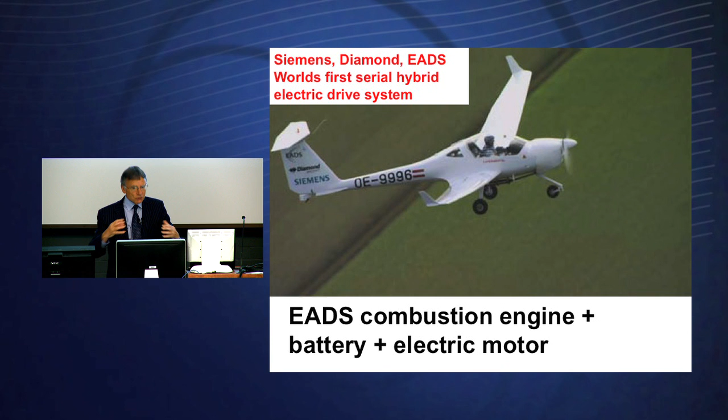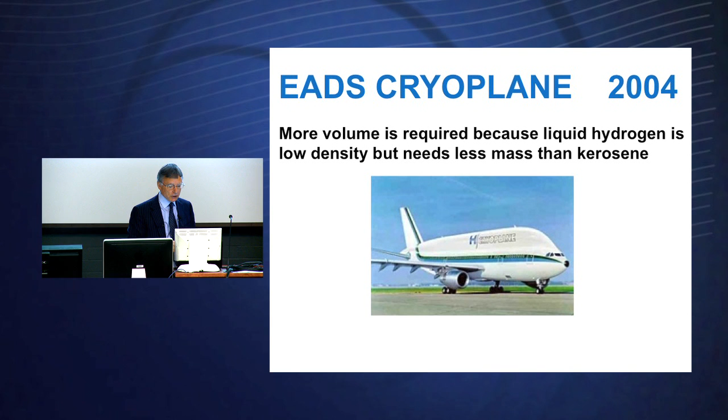So what I want to do today is talk about this idea that hydrogen has a part to play in transport, especially in the future. Right now it's not at all effective or economic. But this is a paper we published this year with my colleague Bruno Pollet. And there are really four topics. How can we store energy in planes, which is very challenging because the weight is so important, and then in ground transport, where weight maybe not so important, but I'm going to say at the end, we really have to consider weight as a key factor in ground transport.

Then what about things like batteries, supercaps? We need pulse power. We don't just want a steady flow of power. We have to take off, we have to accelerate, we have to store energy when we recover energy from kinetic energy. Then what about hydrogen stores? I mentioned cylinders, they're no good. We have to do better. Maybe you have some ideas to improve that.

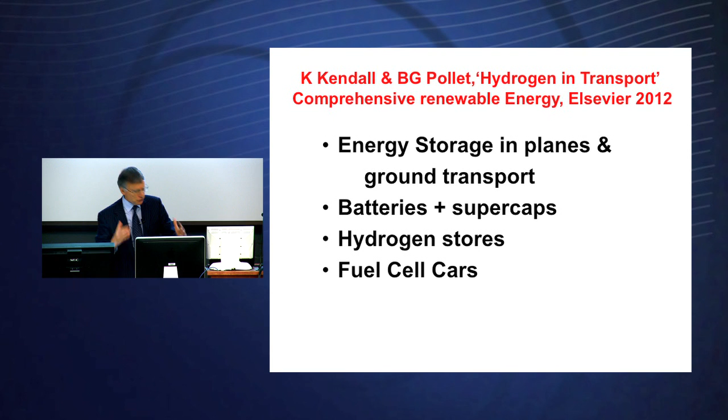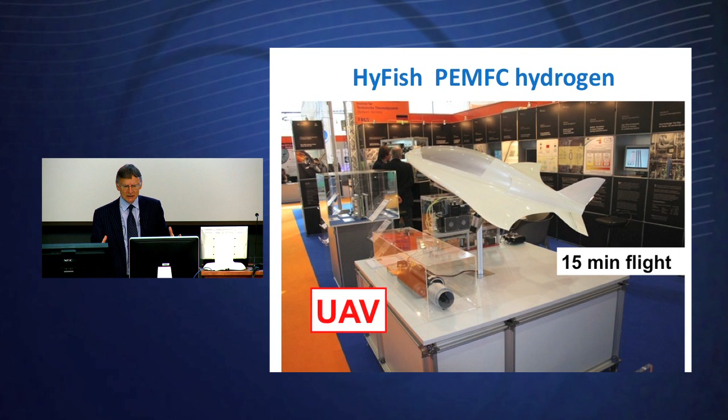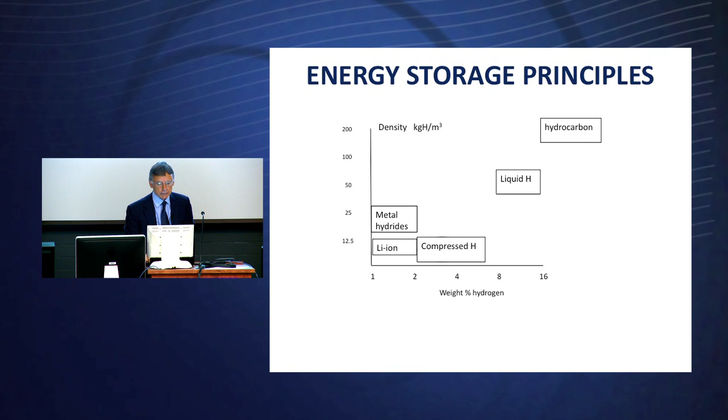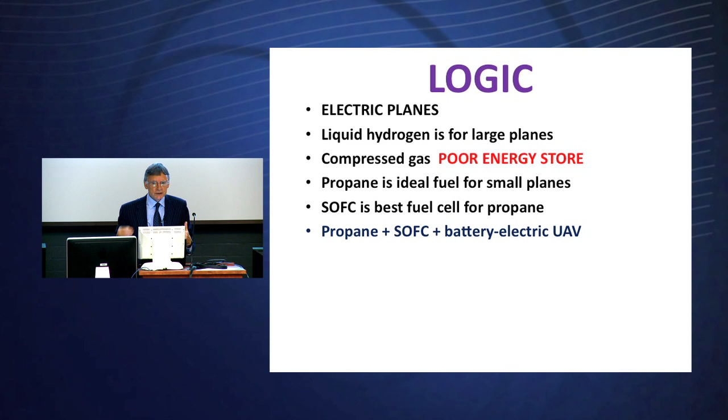So the logic we have, a little project we're running right now, we've run for a year in Birmingham. We need electric planes, they're only small, so we're not going to use liquid hydrogen - if you had a big plane, you'd be using liquid. We don't want compressed gas, so we're going for propane, back to hydrocarbon. There's not too much carbon in propane, it's just a bit worse than methane. But then what fuel cell do we use? Well, the solid oxide ceramic fuel cell running red hot is better on hydrocarbon because we can process it at 700, 800 degrees, rather than having to use platinum in a low temperature fuel cell.

So here it is, a propane UAV with SOFC fuel cell, a battery, and electric UAV. This is the project we got funding from London for. We've run it for a year now, and we're going to fly it in the next 6 months, we hope. It's a UAV with SOFC power, a LiPo battery, propane energy store, and here's the key thing - can we start up this high temperature fuel cell in a few minutes?

That's the nature of our invention, because the ceramic zirconium oxide fuel cell, as you know, expands quite a bit, creaks around, and can crack very easily. Typically, a solid oxide fuel cell from the Australian company CFCL, based in Melbourne, can take 3 or 4 hours to warm up.

Well, that's no good if you want to fly a plane. You want it to start within a few minutes.

So this is an oxygen ion conductor. That's the real key to this, and I'm going to show you a picture in a minute. Then you put on a cathode, a black cathode, this perovskite material. It could be LSCF or LSM, perovskite, and then you wrap a wire around to pick up the cathode current, and you have another wire going up inside.

The real key point about this, we can start this up in seconds. The thermal shock resistance is 10,000 times better than the CFCL one you find in Melbourne. And the smaller diameter is also important, because it's like a heat exchanger. You've got to pack surface area into the reactor. You need small diameter. If you have big diameter, there's less surface, and you lose out on power density.

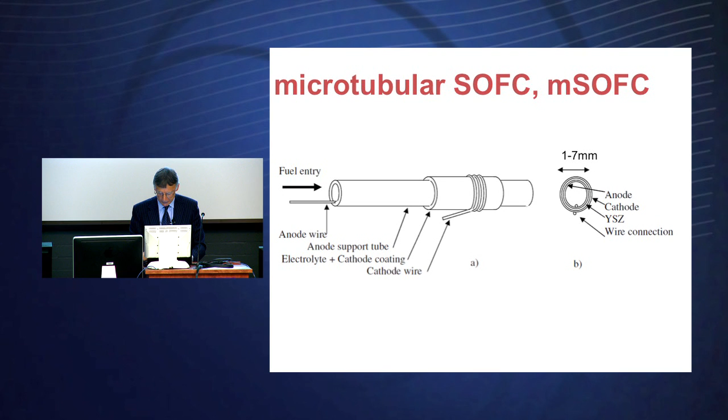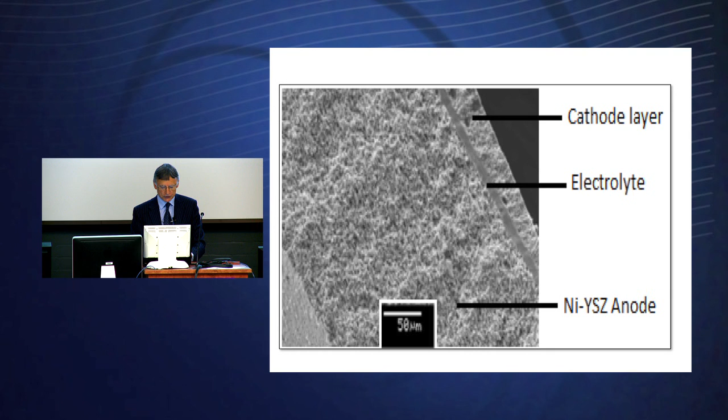And you see a cross-section right here. Here's the nickel anode, which is porous for the fuel to diffuse to the electrolyte. Here's the dense, non-permeable layer of yttrium stabilized zirconia, 10 microns, and here's the cathode. So what happens? Oxygen comes in, ionizes, the ions go through, meet the fuel, and then you get the reaction. 1 volt across it, 1 amp per square centimeter, typically. These are rule of thumb sort of numbers.

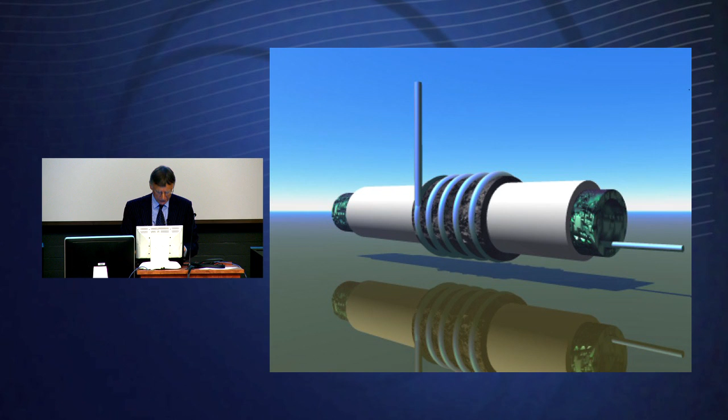So here it is, the 5 materials, a little picture of that. And this contrasts with the original Westinghouse, fairly successful SOFC that came in 1990. They failed to commercialize it, and you can see why. These are 1-inch tubes, 2 meters long, and very susceptible to thermal shock.

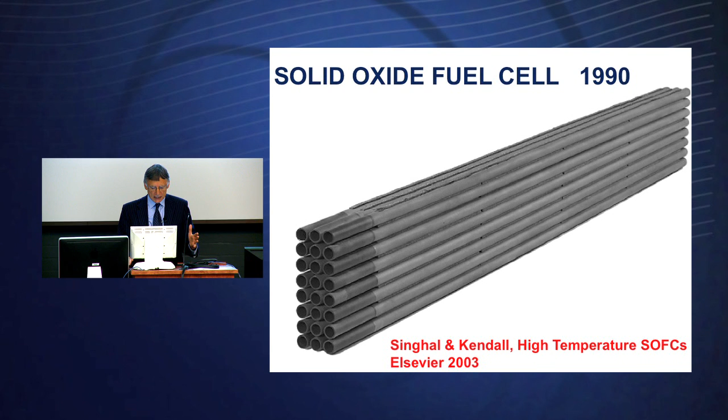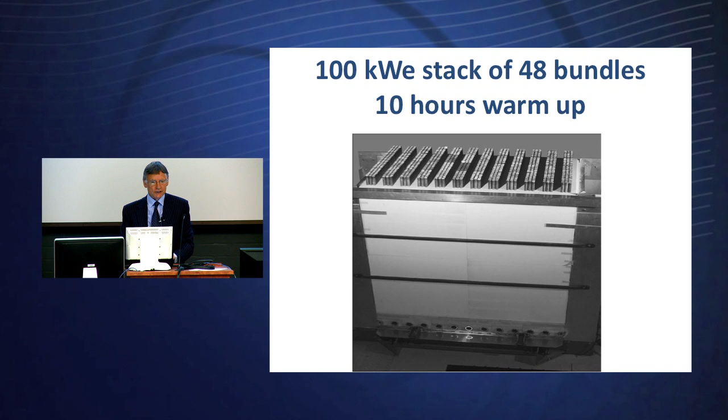So when you try to get this to operate, you've got to build a bundle of these things, a stack. For a 100 kilowatt stack: 10 hours to warm up, 5 tons, and a container to produce 100 kilowatts. Whereas a little combustion engine to do the same thing, a car engine essentially, would fit just in the base of this thing. So you can't really compete with combustion technology with this sort of big diameter, low power density thing.

So you need to get smaller. A smaller diameter means much more rapid reaction time, and this then makes a lot of sense. This is the basis of our operation. And the connection between the startup time, on a log scale, and the tube diameter is very strong. If you have a 1-inch tube, it's 10 hours; 7mm tube, 10 minutes; 2mm tube, 10 seconds. Quite fabulous, nobody quite realized that. It's an amazing change of the startup time as you change diameter, which is all down to thermal shock, thermal gradients.

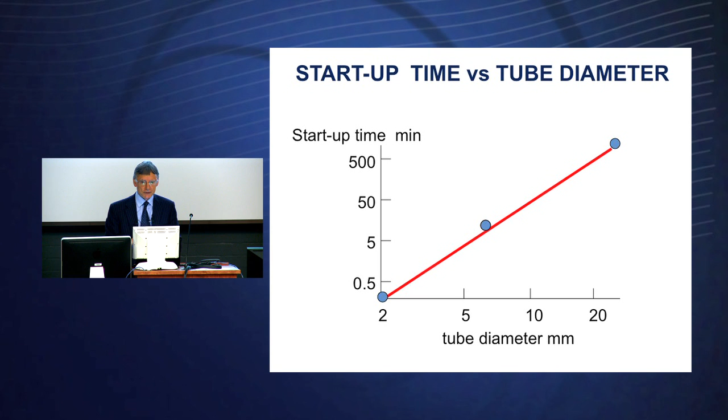We sacrifice a bit of power, but without sealing, we avoid all these problems of cracking of seals and leakage. So it's quite an interesting idea. The idea with our UAV is to get 100 or 1,000 of these tubes, put them in the aircraft and fly them. So that's what we're doing in the project.

We also have, on the back of that, a European project, and I know you have Australian projects here. The European projects have got to integrate across these 25 states. We need lots of partners. I had to write a 100-page document, and we had to pass it with lots of referees. EADS, in other words Airbus, is very interested now in UAVs. There's a company called Survey Copter in France which makes these things. Then we have a whole lot of other collaborators working on this project, and that will fly in the next 2 years.

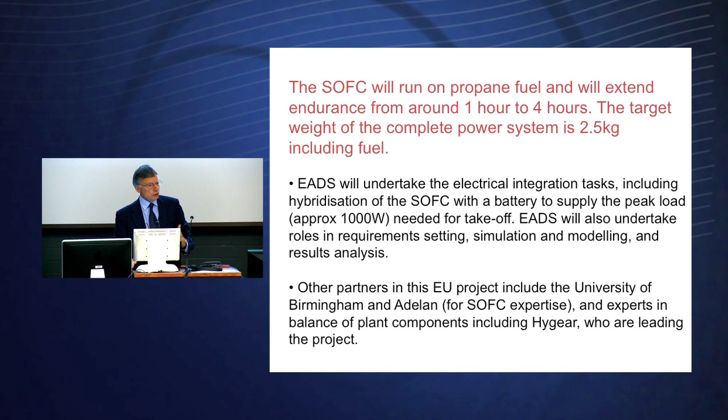The idea is we run on propane fuel, extending the endurance from a battery UAV, which is typically half an hour to an hour, up to 4 hours, hopefully 10 or 20 hours. So it's really energy storage which gives an order of magnitude better flight time in the UAV.

To get back to our European project, we have lots of work packages across these 25 states, and we all speak different languages. We have to write reports every couple of months, you know what it's like. But the key thing is, how do we test this UAV when we put the fuel cell inside? That's what I want to go into now.

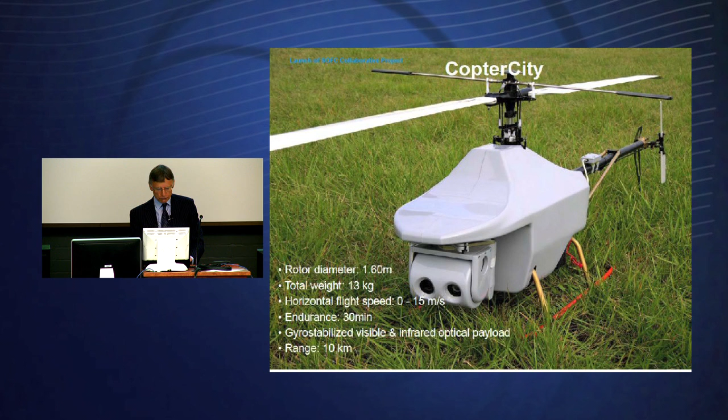EADS, or Airbus from Bristol, went across to France to meet Survey Copter, and John Price, Caroline Turner, and Tom Owen from Airbus talked about what we can put this thing in. Here's a little helicopter being used to take pictures, with fancy cameras, infrared and all sorts of sensors on the front. It weighs 13 kilograms, has a 1.6-meter rotor span, and flies for 30 minutes on lithium ion. Quite a nice machine.

Here's a heavier one, 30 kilograms. You can see the big lithium ion batteries, very heavy, but that keeps it going for about 30 minutes. The problem is when you plot the power use of these things, the big one uses something like 3 kilowatts, the lighter one 1.5 kilowatts. So you can plot a trend line, and here's our power supply, nowhere near good enough to satisfy this. So we have to write it off.

Everybody wants helicopters because they give much more control for taking movies. But in fact we've got to go back to the fixed wing, because here the power requirement is an order of magnitude less. So this should work.

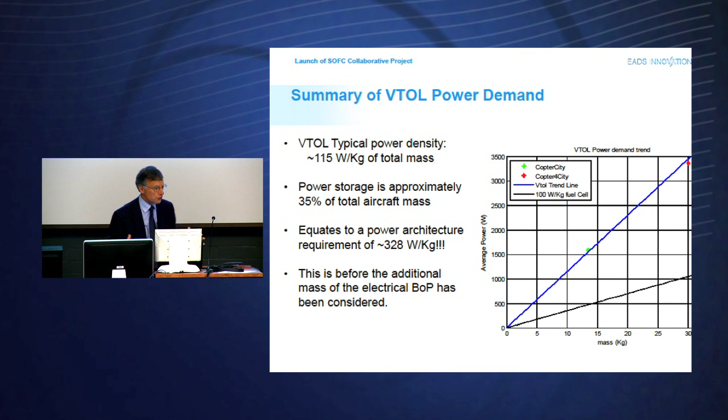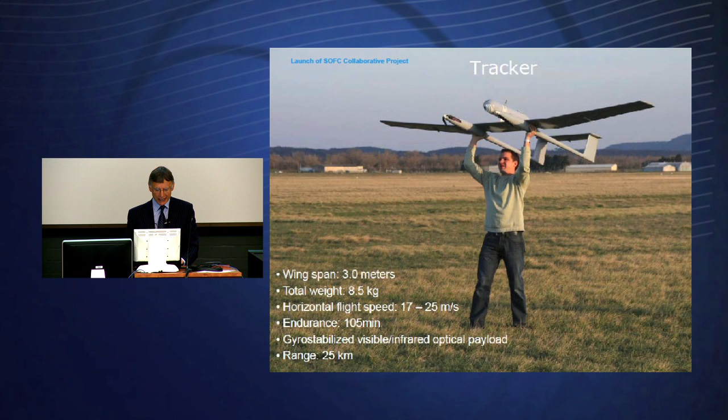This right now is the card from Survey Copter, runs on lithium-ion batteries, electric motor, 11 kilograms, can fly for about 1 hour. Here's a typical one, the tracker, launched by hand, 8 kilograms, flies for 1.5 hours on lithium-ion. Here's another one, 11 kilograms, flies maybe 1 or 2 hours at best on lithium-ion.

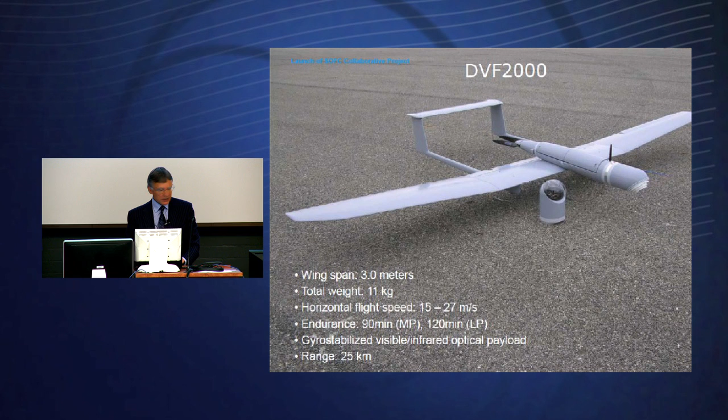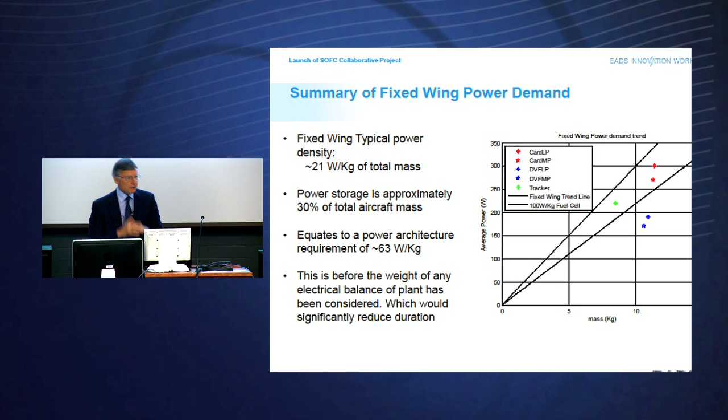Our objective is to extend that with our power supply, putting these points on the same curve. Here's about 300 watts for this, about 150 watts for this, and our power supply can do that. So the idea is we put our power supply in and extend the range. We concluded the helicopter really is a dead duck at the moment - remember we've got a 2 kilogram stack, a bit heavy, 250 watts coming out of it. That's not possible for the helicopter, but these ones, though a bit heavy, should definitely work, and we should get a factor of 10 endurance.

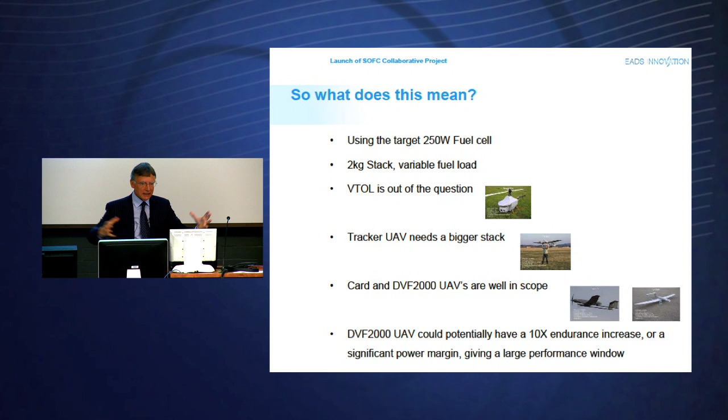While that's going on in Europe with a big European thing, just in our university with a couple of students we're doing the same thing, but with this little carbon fibre polystyrene aircraft. Here's my student Simon - he's flown it on batteries already, and since it belly flops on landing it's pretty robust. Now we shoehorn our fuel cell into here - here's the fuel cell, we're going to shoehorn that in. Here's the batteries, much smaller now, we don't need big batteries, this is just for takeoff. We're hoping to fly this in the next few months.

So this is a work in progress, but hopefully if I come next year we'll be able to say we've had some success - well, Simon crashed one already, so we've got a problem to solve.

So these delicate experiments we're hoping will work. Let's conclude on planes. It's a real challenge to get energy storage on aircraft, but if you can do that, you should be able to do all the other ground transport quite easily.

The real thing is that fuel cells have a great track record in space. UAVs are great for university because they don't cost much and students love them. Propane is a great fuel for energy storage, so we've got a bit of carbon in there.

The designs are available for testing. We've got an EU project. For the helicopter, maybe in 3 years we can improve the power density coming from our unit to get it to that level. We need another factor of 3, 4, 5 to make that work in the helicopter. But we'll be flying the UAV in 2013.

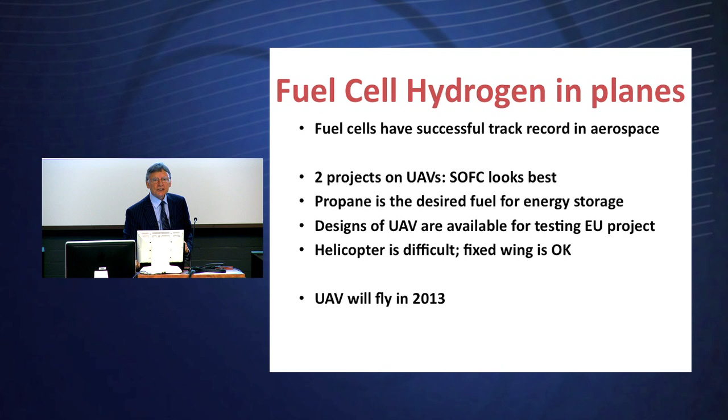So let me now move on to ground transport, because this is my main interest. We need 1 billion cars. Is it possible they could run on hydrogen or clean fuel with no emissions and twice the efficiency? That's the question. There are 4 areas in Europe, and I'm not sure what's happening in Australia here, but the first area is forklift trucks, because in a warehouse right now they're using batteries.

Here's the fuel cell motorbike from Intelligent Energy. Here's the fuel cell bus from Mercedes. And here's our 5 cars outside our university campus driving around.

The thing to remember, a campus is really a test track. You've got to think of campus as a test track. Students are like bollards, we've got to sort of negotiate around them. We don't hit them, hopefully.

A university is a great thing. We've got insurance. We can't run these on the roads, these are prototypes, but the students like them. We're only going 20 miles an hour, very low power. We can do lots of tests on the campus, and it's been a great experience to run these things around. Let's look at the forklift.

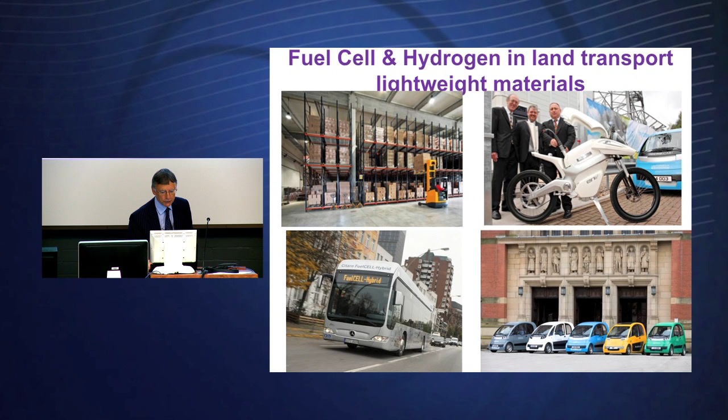The thing about the forklift is we need weight to balance out the thing we're carrying around. So that's useful. Of course, if we're going to take the battery out and put in a fuel cell, battery, and hydrogen cylinder, that takes a bit of doing, but people are doing that. Plug Power, a company in America, put in 1,000 units this year, and a company like Procter & Gamble have converted to this, so this is good news.

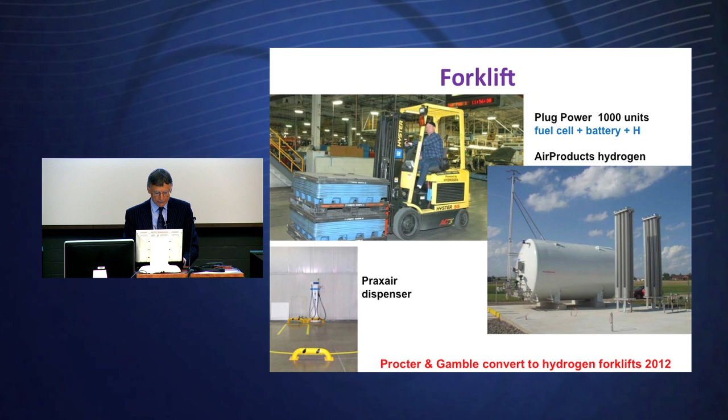Of course, you need hydrogen supply, and companies are supplying liquid hydrogen. That's the best storage. You evaporate the hydrogen in these towers, and then you can dispense it in this plug-in dispenser. In 3 minutes, you can fill it up. That beats changing over a heavy lead-acid battery, which takes 10 minutes.

So this can compete. Also, you can run longer, you've got higher availability because the battery tends to slow down as it discharges, and of course it's green. So this is a useful market if it can prove commercial. That's going on right now in Europe as well as the US.

Now, does a motorbike need a fuel cell? This company, Intelligent Energy, in 2006 produced this very nice design. Of course it had a battery, lead acid, it had a hydrogen tank, it had a polymer electrolyte membrane fuel cell, and of course you had to fill it up.

But consider this, the Ford e-bike, which came out last year, carbon fibre frame, very lightweight, a small 500 watt hub motor, incorporating the lithium-ion battery in the mechanical structure, with a 50-mile range and 50 mile an hour, and a smartphone controller. This can beat a fuel cell because we can just plug it into electric. Why do we need a fuel cell for a small device? Keep the weight down and you gain.

So I don't believe that fuel cells will appear on these bikes, personally. Will the battery not do it? I think it's like the computer - people say oh, we'll have fuel cell computers, but it hasn't happened in the last 10 years. It was mooted many years back. For small devices, batteries probably will do the job anyway, and they're improving and the power demand's going down.

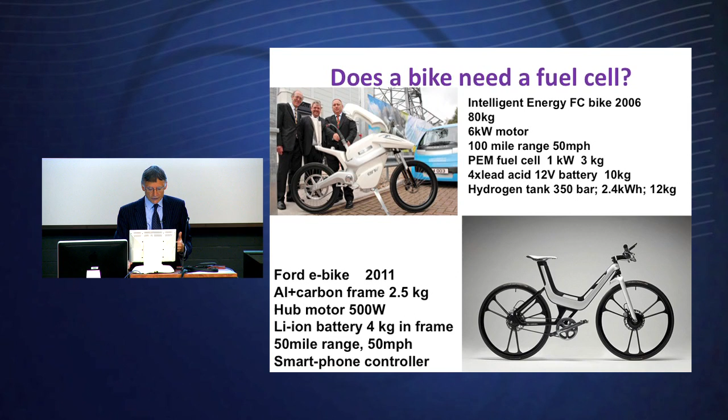So this is the conclusion. Really, weight reduction is a key thing. If you can get the battery to do the job, why do you need hydrogen and a fuel cell? I think it's not necessary. In fact, in China now, they've proved that - there are 140 million battery bikes now in China, 30 million more this year, and 100 manufacturers.

In Shanghai, they banned some combustion bikes because of pollution. I'm not sure you could do that here in Sydney, because there's quite a lot of pollution too. But if you can bring in these regulations, go cleaner, go to electric machines, then this is the way forward, I think.

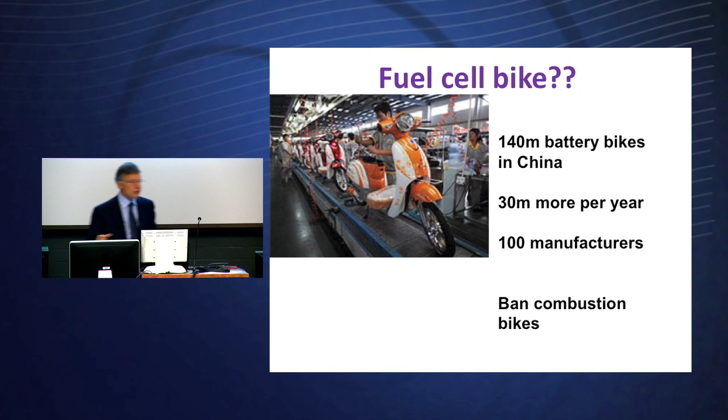Let's go on to the bus, because the bus was the first one in the States where the fuel cell gained some credence in the early 90s. Geoffrey Ballard was a sort of hero of fuel cell development in Vancouver.

He built this bus way back. It was a bit of a problem because it was full of hydrogen cylinders, so you couldn't really get onto it. There was no room inside. And also, he said, we don't want a battery. A battery's cheating. The fuel cell's got to do all the work.

Which, of course, is a very false concept, because if you brake and you've got electromagnetic recuperation, where are you going to store that stuff? The fuel cell can't really handle it. So actually, a battery or a supercapacitor is what you really need, and then you only need half the fuel cell, so it's half the price. So he got that completely wrong.

The modern bus, Mercedes has now developed this, running in the Olympics. We had 8 of these running around London during the Olympic Games. You may have seen that on TV. Here now, the cylinders are in the roof, 30 kilograms, can run for 20 hours, so a full shift in the day. There's lots of room inside.

And here we have then a supercapacitor to store that big pulse when you brake to pick passengers up and then you accelerate away. It makes a lot of sense. So storage there in a supercap is a key thing, I think, for this application.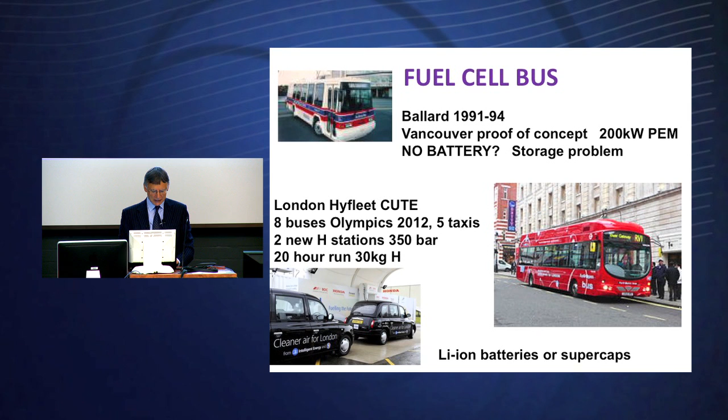And of course here you see some taxis. There were 5 of these. These were using lithium-ion and hydrogen fuel cells.

Now, my main interest has been the car. I'm going to describe more of that. But look, in Britain now, people are saying we need battery electric cars, and there's a big subsidy program in England to have this. There's Mitsubishi.

I drove the Mitsubishi for a year. We had 100 cars of different manufacturers running around Birmingham. And the problem with this, it seems a great idea. We just plug it in at home. But in the city, it's so congested.

You know, you go to Birmingham, there's only about 3 plugs on the streets, and it's so congested, nobody has a garage anyway. You can't plug it in. So you have the same problem as with the hydrogen car. There's no hydrogen stations. So there's still a huge infrastructure problem with this electric system.

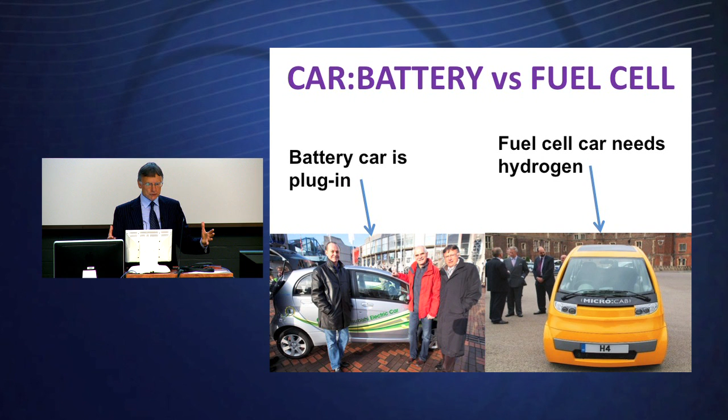We all believe that electric cars are here and that batteries are improving and so on. But consider, when we drove these things around, we had 100 in our project in Birmingham. The nominal range when you get in the car, the battery's full, you can do 80 miles. After 500,000 miles with 100 different drivers, the answer is 56, actually. It's not really quite correct.

I think we need to be more honest. Real drivers don't behave like robots. You know, we do have to get this right. The worst I had was 30 miles. I was driving in freezing weather, it was raining, I had the lights on, and the battery drains very fast.

So never switch on the heater when you're in an electric car. Put on more underwear, that's what you need, because you don't do that in a car with an internal combustion engine. But yes, in reality, the average trip in Britain is 20 miles. We drive less than Aussies, 20 miles, so even the worst case, you can do it.

But think of the charge time, 5 or 6 hours to charge the battery is really painful. And then my battery failed after 5,000 miles on my electric car. It's a lithium-ion battery. It didn't last the distance, and so there's still problems of battery lifetime, cycling life, and this stuff. Still progress needs to be made on the storage mechanisms.

But compare this with the fuel cell car, this is not much better. Honda have done a great job developing this FCX Clarity, which is a wonderful car. Even the petrol head people liked it. It had a 100 kilowatt fuel cell, but that's too big. You could really do with 25 kilowatts. Why not reduce the size? The storage is getting better. They put more battery in now.

Because you need the pulse power for braking, it's very expensive, and of course, very heavy machine, nearly 3 tons. Why do we have 3-ton cars? I don't know, because it's luxury, I guess.

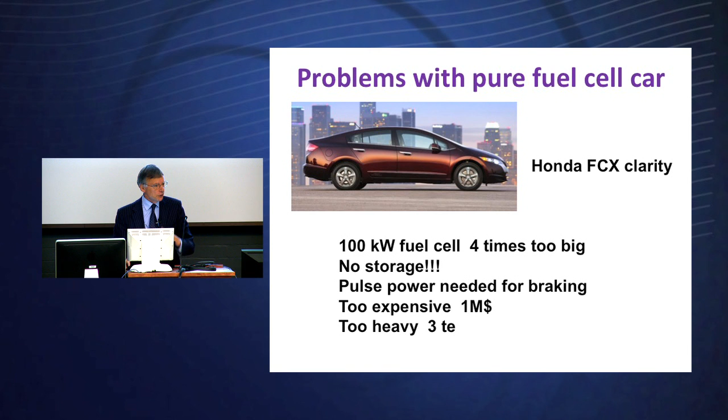But things need to improve with this technology. They're making strides, but it needs to get better. So what we believe in the university: think small, think lightweight, small fuel cell, small hydrogen store. We can plug in as well, because we've got a battery. Make it cheaper, have the rapid refuel, 3 minutes, and that will compete with these different options. That's the philosophy we've come up with, and let me describe some work we've done on that.

But first, it's necessary to think, should we have a supercap in the car? Should we have a battery? We certainly want a fuel cell. Let's consider the supercap, because right now the energy storage is 5 watt-hours per kilogram, you'd need 5 tons of this supercap to put in your car if you wanted to go a couple hundred kilometers. It's not going to work.

But for pulse power, yeah, the cycling availability is amazing. Lead acid is still there. Of course, the big one on cars is nickel metal hydride from Toyota. 95% of electric cars have these batteries. And then what about lithium ion? I'm sure many of you are working on lithium ion nanotechnology to get better charging performance, better power output, and better cycling.

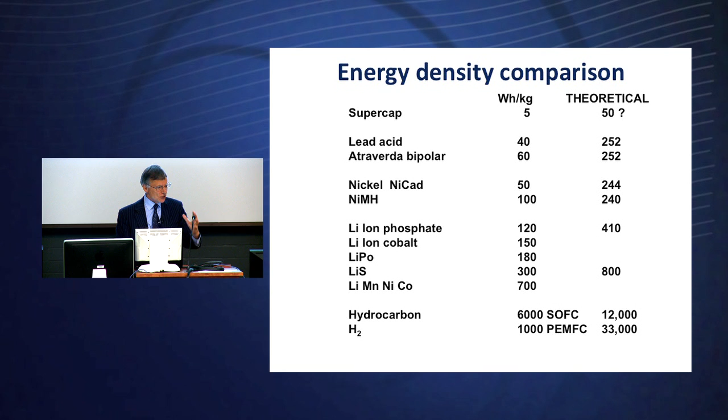And of course, we believe at the end of it that hydrocarbon will be good for SOFC, which I talked about in the UAV. And then the hydrogen PEM polymer fuel cell, very much limited by this hydrogen storage, the cylinder, heavy cylinders. Because in theory, this should be 33 times better. If you got ideal hydrogen storage, this would be absolutely fantastic, and there's an invention just waiting to happen. If you can find a magic hydride store or a magic system, you're in business.

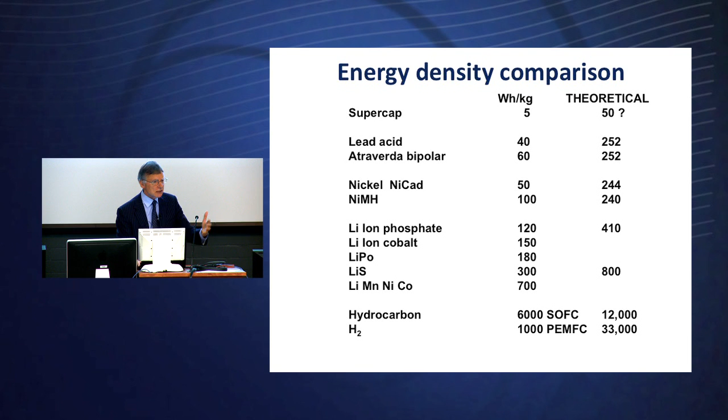Of course, SOFC could improve a bit as well, we could improve the weight. Certainly lithium ion can improve a lot, if we can go up by a factor of 2 from typically 150, because this is a bit better than nickel metal hydride, which has probably reached its limit. But lead acid could still come up by another factor of 3. And what about supercaps? We believe there's still great potential in these developments, which needs more science and really more engineering to get this right.

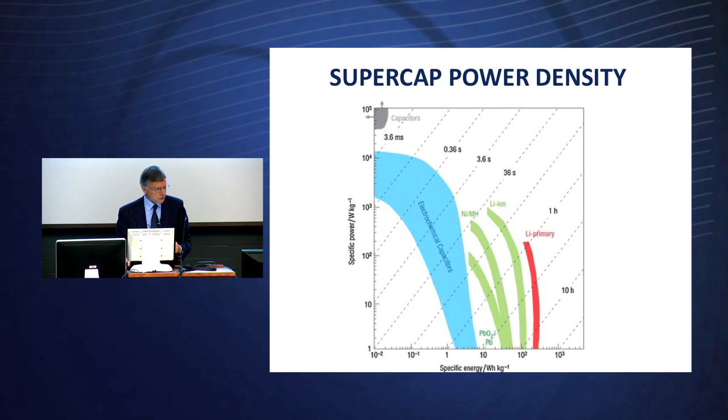Let me describe a bit of lead acid, because I worked on this for a number of years. The strange thing about lead acid is nobody's invented the interconnector to get the planar bipolar stack, because materials just cannot withstand those high acid conditions on the one hand or high alkali on the other hand. So let me describe this material, Ebonex.

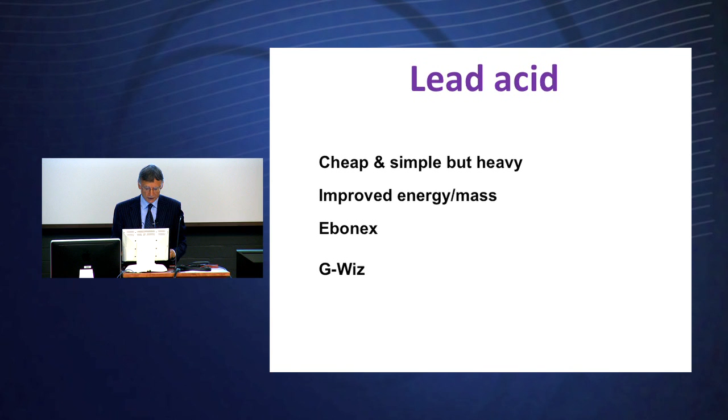It's basically Ti4O7. So you take titanium oxide, the white powder, reduce it in hydrogen at 900 degrees, and you get a metallic material - you lose an oxygen here, Ti4O7, you get this metal conducting material. You densify that to form a plate, and you can see it's a distorted rutile structure, a Magneli phase. It has better corrosion resistance than a lot of metals.

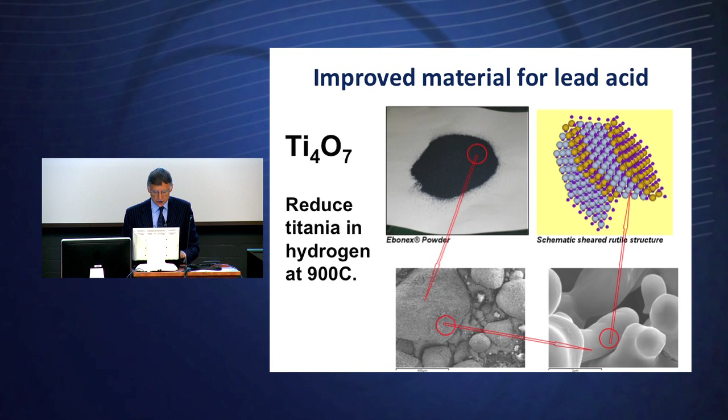So what you do then is build a bipolar battery, so you can connect these things through the plates rather than bringing the current around the plates, which is what happens now, and which is very inefficient in weight terms. This Atraverda company have now said they can improve from 40 to 50-60%. It's a bit like the biggest invention in batteries in my lifetime, going from the heavy lead acid case to the polypropylene case - that essentially doubled the power density. So you don't need a huge nanotechnology invention. Maybe even simple things can bring benefits.

And this, I think, is quite an interesting development, to get a bipolar plate which is corrosion resistant. And remember, in London there are more of these lead acid cars, 3,000 in London, than any of these lithium ion cars at the moment.

This is a cheap and cheerful sort of car, the G-Wiz. Of course, it's quite light, 600 kilograms. It can only go 40 miles, but I'd say that's 20 miles actually - you've got to be a bit more pessimistic. And of course, the price is the key thing - this is 3 times cheaper than the lithium ion one.

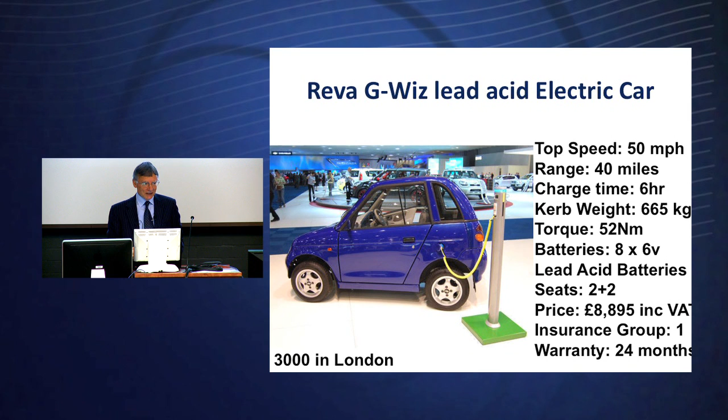Even with the subsidy, this doesn't get subsidised, but people buy this because when you drive into London, you pay a congestion charge, and that essentially pays for this car in 2 years. So you get an exemption from congestion by using a zero-emission car.

Nickel metal hydride, I think it's pretty mature now. Everybody knows that's a safe battery. 95% of cars use it, and of course the cost is reasonable—$250 per kilowatt hour is much better than lithium ion.

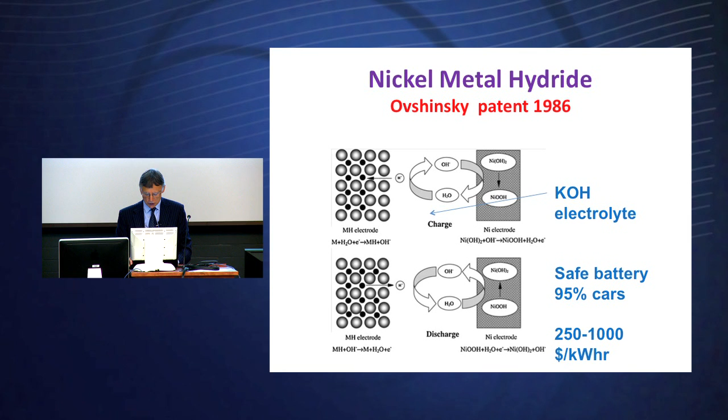And lithium ion, I'm sure, can improve. I'm not an expert in that, but I feel we've got the odd student working on lithium ion because obviously it's a key part of a system. Looking at the recent review here, there's no doubt that you can make advances. I think particularly with this cathode, if you can go to these new, complex cathodes, then I'm sure you could get a doubling. But what's the limit? Nobody really knows the limit.

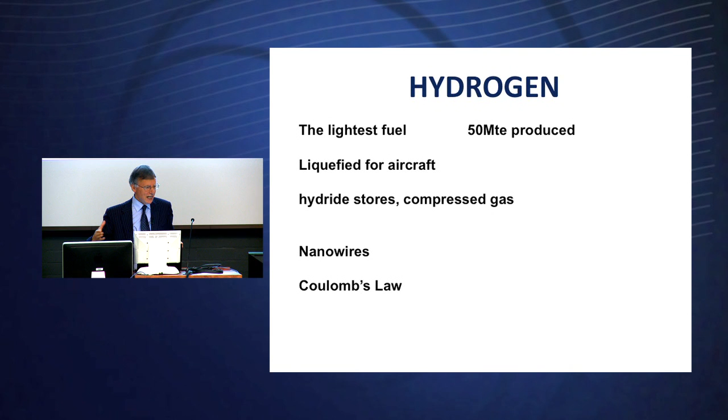So let me focus now on hydrogen, because that's my main theme today. People often ask me, there is no hydrogen. But I come from a chemical company, we made 100,000 tonnes each year of hydrogen. There's 50 million tonnes on the planet. This is a major thing, but it's all on chemical plants and the petrochemical industry. If that gets out to the consumer—remember, we don't have many pipes for this in England, we have 20 miles of pipe for hydrogen in England—but the infrastructure will develop and I'm sure this will become available.

So let's talk about how we can use that, because I think there is a key place for hydrogen in the future. Here's a picture we've got to understand. Here's our present diesel fuel: if we drive 500 kilometres, we need something like 33 kilograms of diesel. We need a tank, so it comes to 43 kilograms, 37 litres, and in the tank it's 46 litres. So this is what we have now.

Look at lithium ion—a factor of 20 inferior. So we've got to make up some ground there to go from lithium ion batteries to what we now have. That is the gap that has to be filled.

Now, if you look at compressed hydrogen, remember there's quite a high pressure, 700 bars, which is now one of the standards. We only do 350 bars in Birmingham. 700 bars is possible, but again, it's perhaps reaching the limits of the pressure technology you want to use. Here you see you're only storing 6 kilograms of hydrogen, the tank weighs 125, but still we're 5 times better than lithium ion, and the same with the volume.

And really, look at this—anybody here got a compressed gas car? They use the same tanks as hydrogen, so if you're using compressed methane, that's the same technology, and hydrogen should just be comparable. The danger is the same, the pressure is the same, the tanks are the same. We're not using a combustion engine, we're going to use a fuel cell, but essentially there's a model there we can go into—it should be familiar to people.

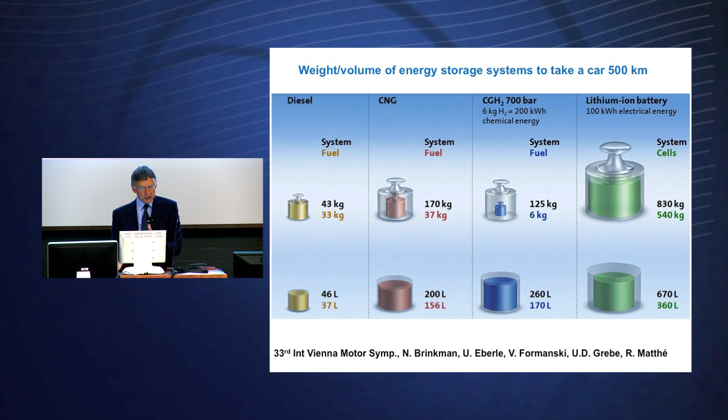So whereas lithium ion, I think it's got some way to go. And of course, hydrides—in Birmingham we've got this barge, Professor Rex Harris and his team, they've got about 20 students working on hydrides. But of course the standard hydride, lanthanum nickel, is only storing 1% of hydrogen in this great tank. So you've got these tubes, you fill them with hydride, but it weighs a lot. Of course, in a barge it doesn't matter, you've got to have ballast in there. But this will weigh 300 kilograms, so you're not going to put that on a car.

So hydride, it can work, people are using it, it's only low pressure, 10 bars, which is quite nice compared with 700. But is that ever going to work? Can you bring the weight down? You need a better hydride and, of course, better kinetics. Can you cycle and get the kinetics because of the heating effects and cooling effects going on?

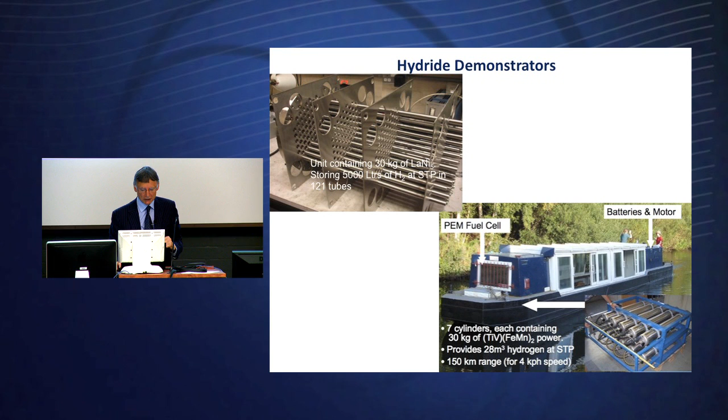So the main thing right now is the physical method, compressed hydrogen. This is the tank—well, 2 tanks—that go in the Honda. They're quite big tanks, and that's why it's a bit bulbous. Obviously you'd like to reduce the size of this. These contain about 4 kilograms each at 700 bar.

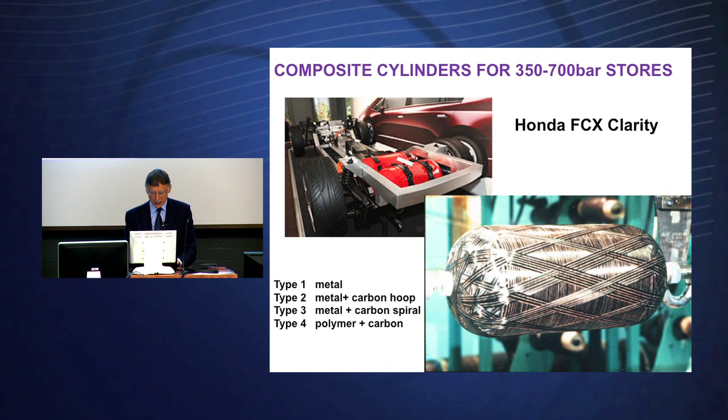And of course, it's a Type 4 tank, which has a polymer core to hold the hydrogen in, because hydrogen is quite permeable—it permeates through many materials. And then carbon fibers hold in the stress. So it's a very nice tank, the same sort of tank you would have on a gas or methane car.

Here's what happens if you pierce it. Never sit on the boot - that's the suggestion, because this 10-meter flame will shoot out.

But compare that with petrol. In the petrol car, you're dead, and also the car's no good. Here you can drive this away on the battery later on. So there are some benefits to hydrogen.

Of course, it is dangerous. We all know there's a lot of energy, and we don't want to be sitting there when it goes off. There haven't been any incidents yet - there are now 300 hydrogen cars running around across the world, and we haven't had any incidents. There have been crashes, but no incidents of this kind. So we need safety, we need testing, but essentially there are some benefits to hydrogen.

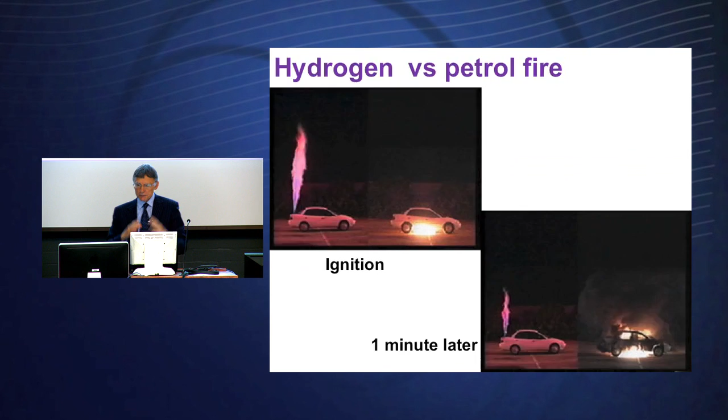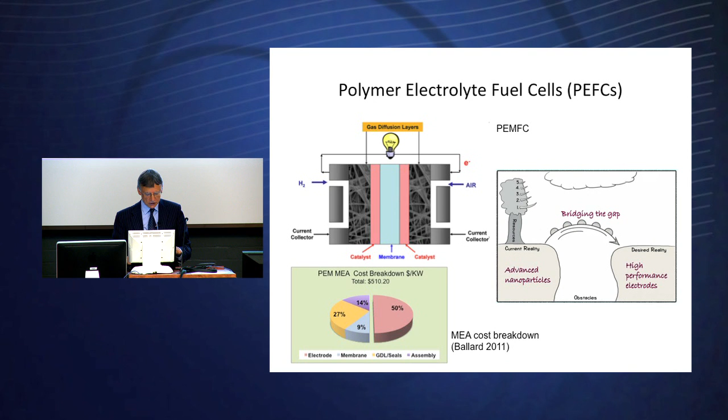So what you need is to improve that. I want to give an example: my student, Shangfeng Du, has worked on these nanowires of platinum, because he's shown that by using nanowires instead of particulate, 5 nanometer particle catalyst, you can get an improvement. So he shows its platinum structure here, at nanowires.

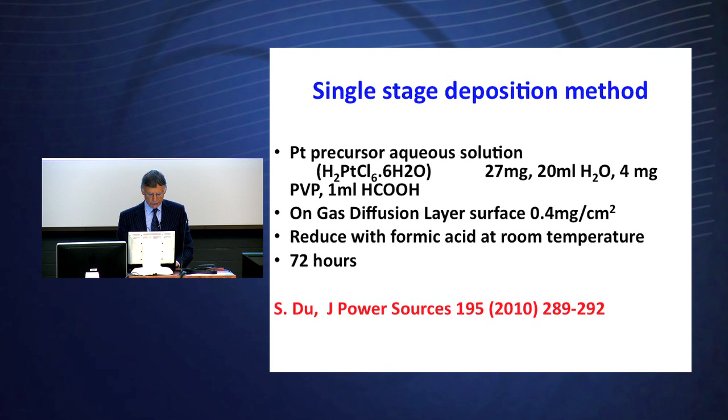He's got a single stage method, which is interesting. You just take the chloroplatinic acid, a bit of PVP, polyvinyl pyrrolidone, a bit of methanol to produce the nanowires. Then, after reacting with formic acid, over 72 hours, you can get a layer which gives better properties. Here is the result - a 20% improvement on the standard, industry standard material.

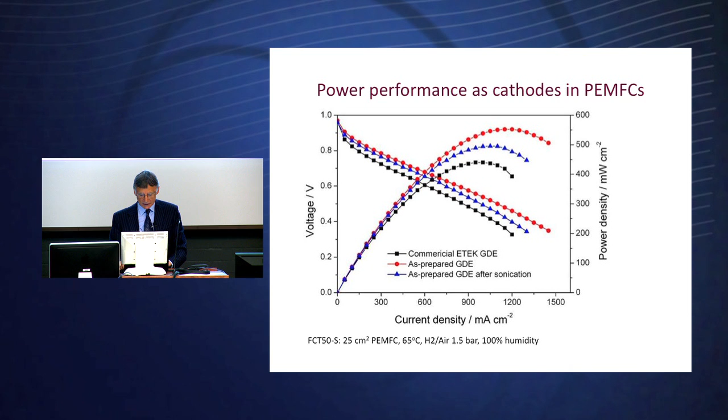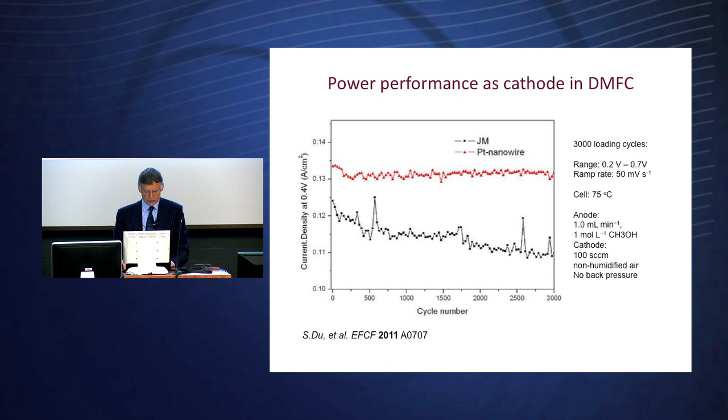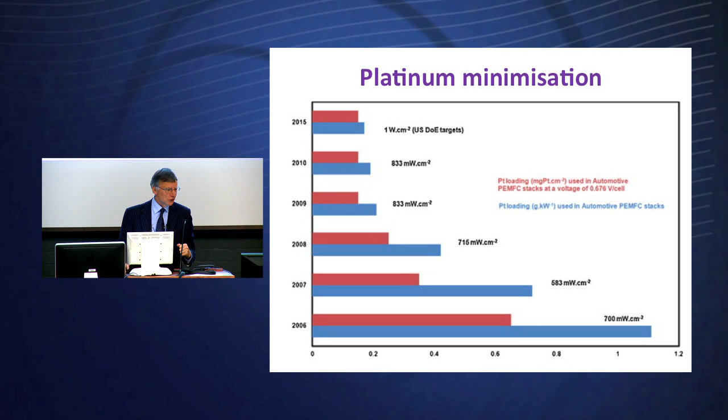So you have a few hundred dollars of platinum in your car. Of course, they said the platinum car exhaust catalyst would never work, and this is getting better, so it will work in my view.

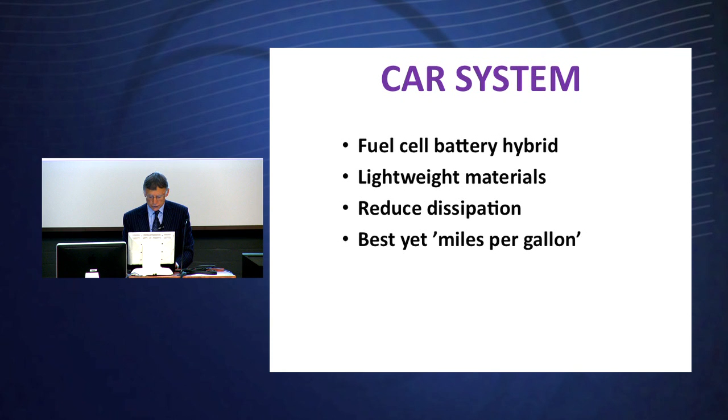So let's talk about the system now. If you had a car system, you need a fuel cell, you need hydrogen storage, you need a battery. And we need lightweight materials as well, because this can be a critical area, and we need to reduce the dissipation to get more miles per gallon, essentially.

So this is where we started 4 years back, and we got the money to put in the hydrogen station in chemical engineering. We then got 5 of the cars to run around and test it.

What was interesting was that the inventor of the car - he'd had it around for a couple of years - a guy called John Jostins. He came from Formula One, worked for Williams, the Formula One team. And of course, the key thing in Formula One is to get the weight down as much as possible and improve performance. He'd done the same - this car is really just half a ton.

He's trying to sell it to Prince Charles. He did look like buying it when his hand was in his pocket here, but didn't quite work out. I was so keen, I said let's have 5 of these, because this is ideally a hybrid, it's lightweight - of course it's low powered, but we're going to run at 20 miles an hour, so it's ideal for a campus situation.

The construction was really quite fabulous. He learned all the techniques from Formula One - an aluminium structure, a honeycomb to put the batteries, low centre of gravity. All the hydrogen was in this back compartment. Lightweight panels, a couple of standard windscreens and tyres and wheels.

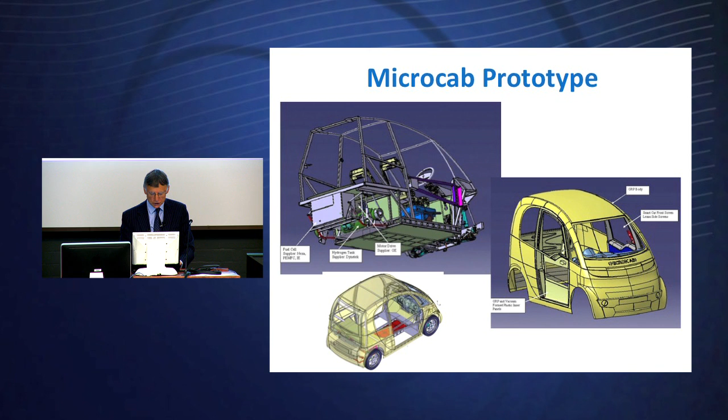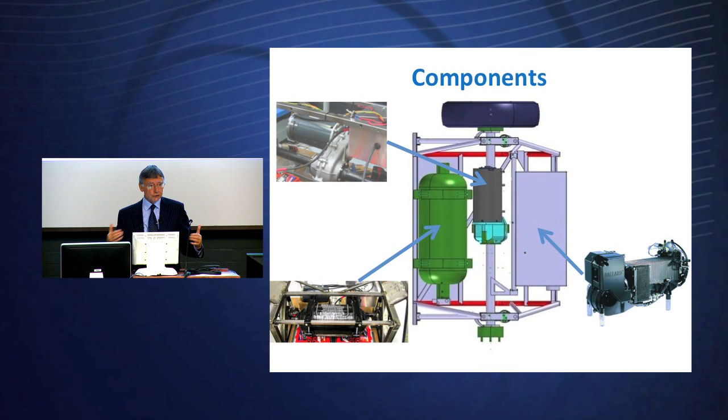But I thought it was a very inventive sort of design. You can see just a simple washing machine motor on the back here, 4 kilowatts, which is enough for a campus, and half a kilogram of hydrogen, which would run for 1 or 2 days. Then the Ballard fuel cell, only 1 kilowatt, a bit underpowered, but that was enough for campus cycling because the battery was doing the pulsing and the fuel cell was just giving that continuous supply of energy.

Now, the most disappointing result we had was that it was only 18% efficient. We started off with 100 megajoules of hydrogen in the tank, and we ended up with 18 at the traction on the wheels. That's because we're losing in the motor. It wasn't a very good motor.

We're losing in the batteries, we're losing the DC converter, we're losing the auxiliaries, and the fuel cell, we're running it too hot. We could have improved this by a factor of 2 by putting a bigger fuel cell in and not running it flat out. So we had to change that.

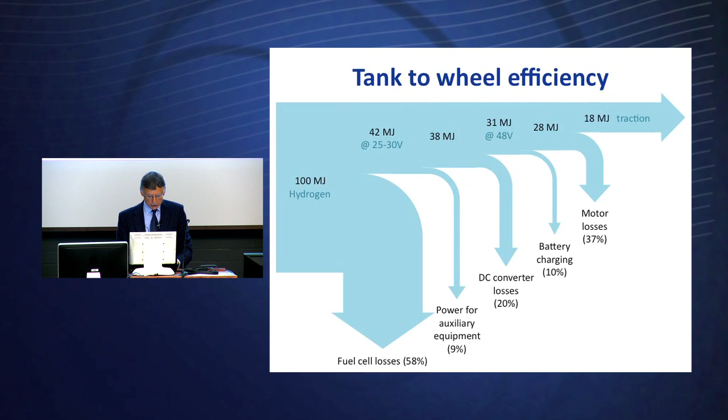Remember, in America, 30 miles per gallon is the average new car, which is quite abysmal, really horrifying. We're much better in Europe because people have focused on this, using better fuel utilization. The typical diesel van we run around campus here is 25 miles a gallon. So on the campus, we doubled the performance in terms of energy use, even though it was crude.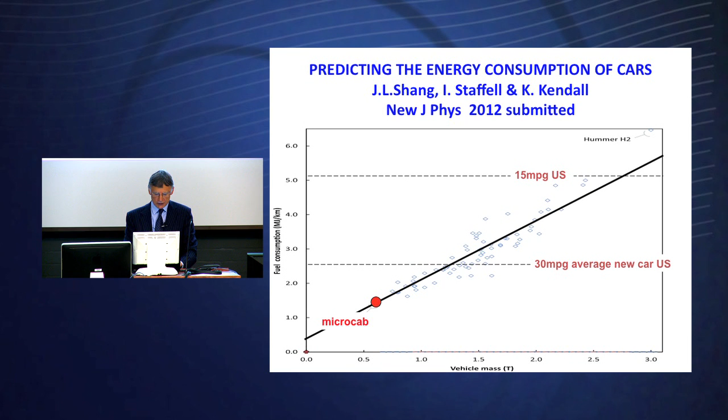So the real question we had was, why is this a sort of straight line? Remember, all these points just seem to depend on weight, a bit like the friction law, Coulomb's law. You remember that's just friction force on a sliding lump of material is a coefficient of friction times weight plus a bit of stickiness or some adhesion term. There's an intercept right here. But why should a car behave like that?

That's the question we asked, because we have friction, like tyre friction, which is obviously like Coulombic friction. We have brake friction, but then we have air viscosity, auxiliary power, battery loss, motor loss, lubricant loss, lots of different losses. Why should that give the same behavior as a simple Coulomb thing?

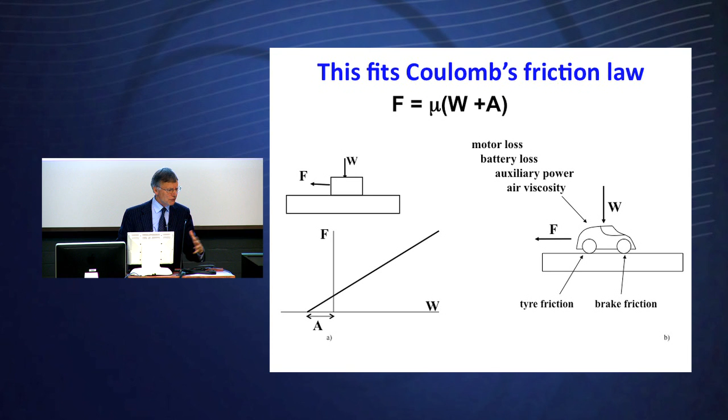Here's the idea we came up with, which is just being submitted for publication. The idea is you take a lot of different functions, say 10 random functions, and reject the bad ones, like log W, which you don't like because they go to infinity. Add them up, and you do get something like a Coulomb's law curve here. It's really quite fascinating that we can get Coulomb's law out of all these funny functions added together. So we believe that in a complex dissipative system, these all balance out to give this behavior we're getting with cars, which is quite strange.

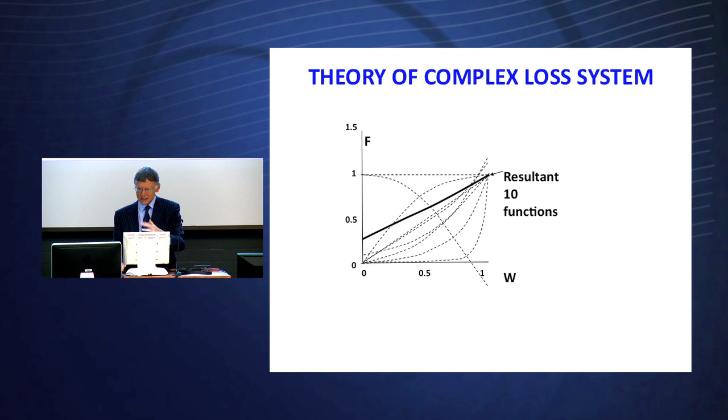In Formula One, they've recognized that weight is a key thing for many years, and of course wind resistance and all these things. But to actually say you can fit this with a 2-parameter model is quite astounding, I think.

But the real objective is then, can we improve the dissipation, bring it down so we get better components? Better motors, better batteries, better fuel cell, get rid of the DC converters, have better control system, all the rest. This is the recent model, which came out this year, and now we've got a new project with this one, and this is far better. You see it running around the campus, and this is now much better acceleration. It can go 60 miles an hour rather than 20 miles an hour. It looks a bit strange, but then all new cars do.

And the students love this. And now we're going to test this in a big program to make sure that we can now justify this development. Have we made progress?

And we think we have, because now the improvement is quite significant. Here we were at essentially 50 miles a gallon with the original prototype. We've now gone to more like 90 miles a gallon, not quite a factor of 2. But now all the new hydrogen fuel cell cars being developed by industries like Daimler or BMW show a lot of scatter here, but I think that's because they haven't fully optimized.

They're still improving some of those individual components to bring it down to some kind of curve, but we're as good as anybody. The weight increased, we had a bigger battery and a bigger fuel cell, but essentially we're still well below a ton, and you can see that weight is really still important, so we need lightweight materials.

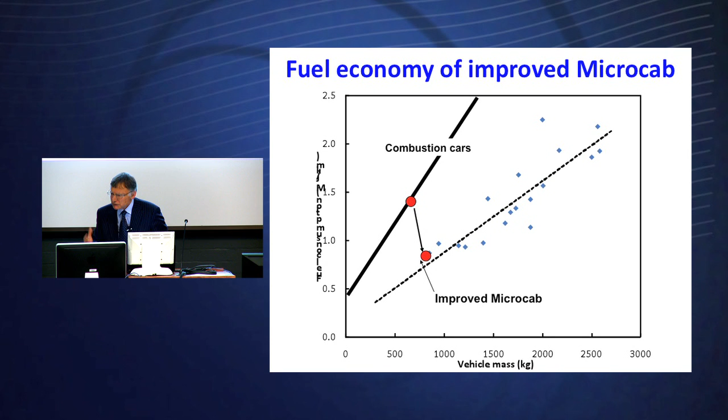It's really learning from Formula One. We have to get better carbon fibers, better design, lighter weight components altogether. That's a key thing. Now compare the performance with the battery vehicle.

Battery vehicles normally could do 80 miles, now we can do 300. Obviously with rough driving it will go down. The fill time is 3 minutes rather than sort of 6 hours, and we have the same energy consumption as a battery. Because the battery vehicle's heavier, you've got a big battery in, we can be lighter weight, and so we can still come in, even though we've got a rather inefficient fuel cell in there.

So just getting towards where we are now. Here's a very inventive guy. He came from Formula One as well, a guy called Hugo Spowers. He works in the Oxford area, in the Formula One region of Britain. He's developed a carbon fibre car now with supercaps and these hub motors, so you can get much better regeneration of energy from kinetic energy.

So this is quite fabulous. We haven't tested this yet. This was the first prototype, but he's going to be producing 30 this year, we believe, to test.

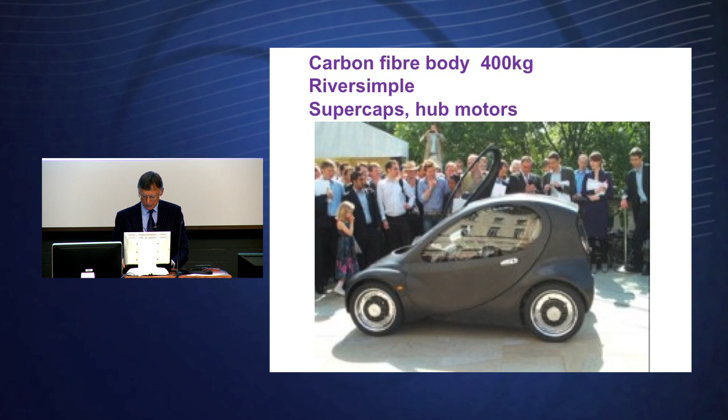And the race to market is on. All the big companies say 2015 is their target. Hyundai are even more positive - they reckon next year they're going to produce 10,000 of these, so let's wait and see.

I think with 2015, when you say race, they're all racing to the same target, and it's all going to be the same price. It's one of those races where they're all winners, I think, these big car companies. So they've got it fixed.

Of course, we said in the 90s it was going to happen in 1998 with the California legislation. It all failed in 1998. Let's hope this goes through. But you can see there's so much progress now internationally that we think this will have some outcome.

And these different technology challenges of energy storage - I don't know what energy storage these people are using, they're quite secretive. What are they actually doing? We've still got to find out, but hopefully we're moving to converge on a really good energy storage for the future.

So let me conclude. I think fuel cells and hydrogen are coming into transport gradually over a period. It's going to take many years to displace combustion. But SOFC and propane looks good for UAVs because propane is hard to beat as an energy storage liquid.

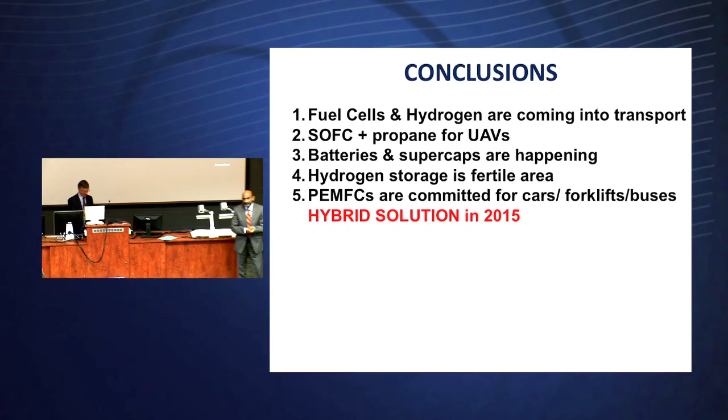Are there any questions or comments before we continue? I recall there was enthusiasm a while ago for liquid hydrogen as a hydrogen storage method. Has that advanced, stalled, or gone by the wayside?

If you look at the patents, they're emerging the whole time. I remember the one from Millennium Cell, which came out in the late 90s, early 2000s. They got $100 million to develop the borohydride liquid system, which looked interesting, and lots of people supported it. But the real problem with borohydrides, although they fit the energy density criterion of 6 weight percent hydrogen, the DOE target, is that you then have this waste borate material. You get the hydrogen coming off with the catalyst, and you're left with sodium borate solution. What do you do with that? You've got to carry it around in a tank. Nobody's going to let you drain that out on the road surface. And then you've got to recycle it. So there's a whole new infrastructure required, which has slowed it down.

But there are many other ideas. People have thought of using microcapsules or even nanocapsules, where you have some material inside that can act like a liquid rather than being a solid hydride. The inventiveness and creativity there is quite interesting, but it hasn't yet come through.

When you talk to the big companies like Exxon, Shell, or BP, they say forget it—we've got fuels already, and we're moving gradually down that carbon chain toward hydrogen or methane. They're on that track and don't want some diversion that lasts 5 or 10 years. They've got their eye on the main thing, hydrogen by 2050. BP sacked all their hydrogen guys a couple of years back, saying it's too early right now. Shell did the same—they had a group of 50 hydrogen people in Holland working on this. But it's all about timing. When can you predict it's going to happen? When will the consumer like it? When can you satisfy all these niggling problems? So I think each of these ideas is valuable, but getting it to work is a major challenge.